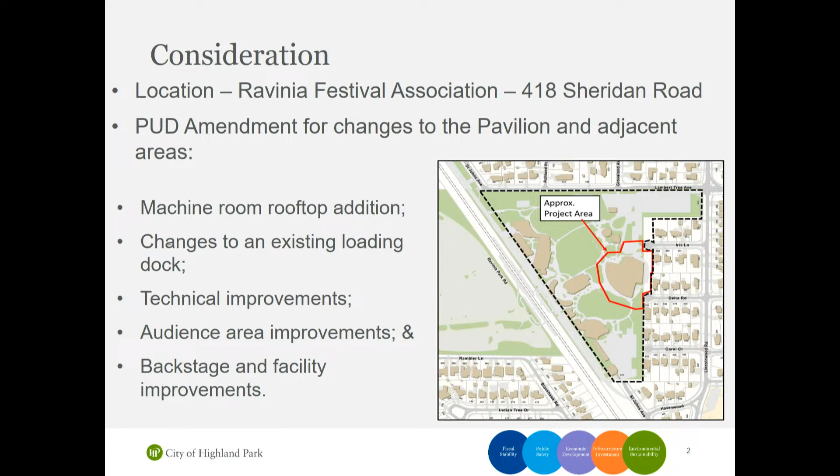This is a presentation on the continued application by Ravinia Festival Association for their Planned Development Amendment and Design Review. This was at the commission two weeks ago on June 4th, and it was continued to today. This slide is the same as two weeks ago, just showing the location of the approximate area of change of improvements.

The project is multifaceted, but it includes a machine room rooftop addition on top of the building within the footprint, changes to expand an existing loading dock on the north side, various technical improvements throughout the pavilion building, as well as audience area improvements to the auditorium area, and backstage and facility improvements.

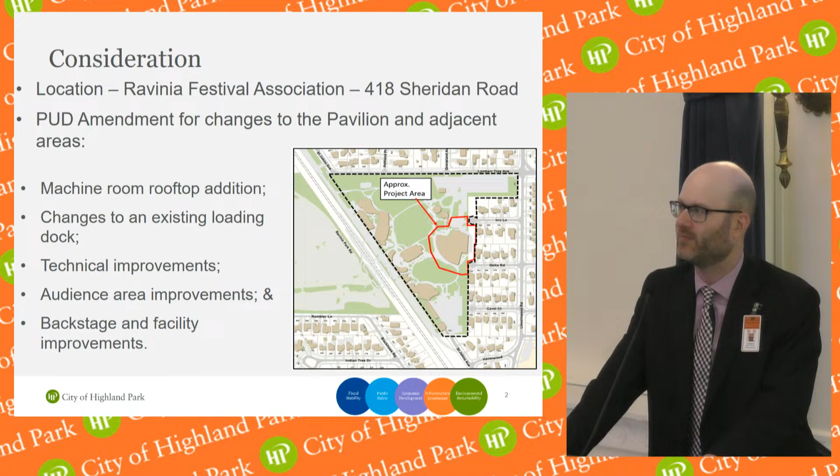There's also the requirement for a solid fence along the loading area, per an Article 22 landscaping requirement. The applicant submitted an updated narrative where they indicated they are open to that discussion. Staff indicated in the report that the commission can discuss if a solid fence along the loading area, in addition to what's already proposed by the applicant, is appropriate.

In the applicant's updated narrative, they put to writing what they had testified to two weeks ago, that they would be fine with some type of timer for the new wall-mounted lighting going along the east facade facing the neighborhood. It was staff's recommendation in the report that the commission could consider as a condition that the wall-mounted lighting be turned off by midnight or whatever time the commission deems appropriate. I know the applicant had discussed midnight in their narrative. The proposed signage lighting could match that and be turned off by whatever time the commission deems appropriate.

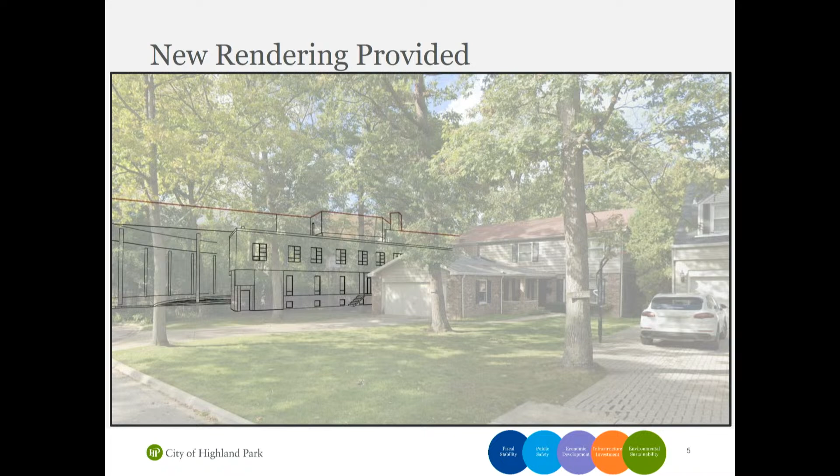I believe this is an applicant's exhibit, but I believe it's from Google Street View, because I pulled up Google Street View and it's essentially the same. The Ravinia Pavilion building, you can see it right there. So this is the applicant's exhibit of the existing conditions, and obviously there's tree cover in between.

This is the applicant's exhibit of the new rendering, so I can just go back and forth. We're looking right here at the machine room rooftop addition. Related to that, staff and the commission wanted to clarify what the step back was, how far the addition is from the edge of the roof. At the closest point, the north, it's 8 feet 6 inches back from the edge of the roof. It's angled, so it opens and gets further away as you go south, but that's the closest point.

This is just meant to show this. I tried to zoom in on it. This was in the packet, showing the step back, setback, and how it opens. This also shows that the distance to the nearest property line is 66 feet.

Modification changes: the impervious surface ratio - the applicant added pervious area that was highlighted on the landscaping plan, so there's no net change.

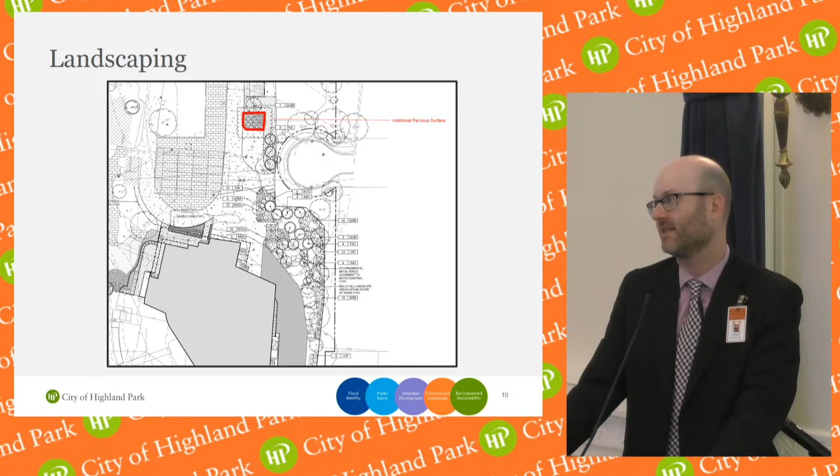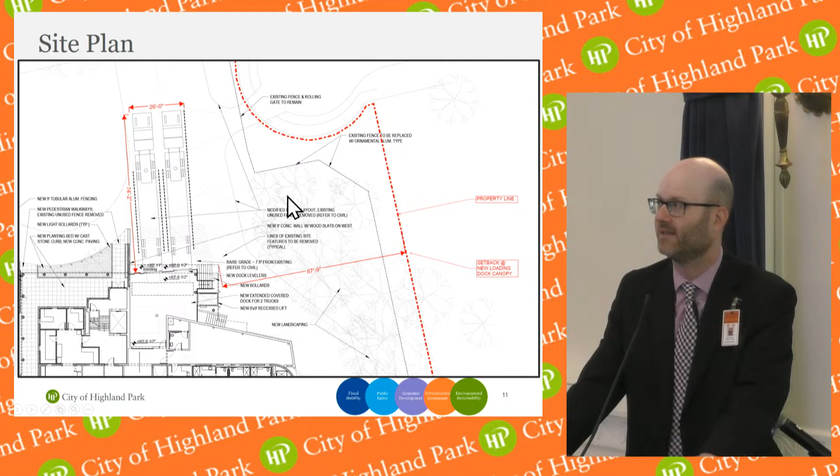This was the landscaping exhibit, again showing the pervious area that was added - this was in the packet. And this is showing the loading area, again in the packet, showing how the loading area is expanding. It's better shown in the packet, but you can see the landscaping the applicant is proposing along this area. They meet the landscaping quantity requirements - they're meeting and exceeding the quantity of landscaping that's supposed to go in.

And so that's my presentation. This is a public hearing - the commission should reopen the hearing and take testimony, deliberate and direct as appropriate. The commission, if ready, can direct findings of fact to come back at the next meeting. The commission is a recommendation body for planned developments; the city council is the decision maker.

All right, thank you. Do we have any questions for staff at this point?

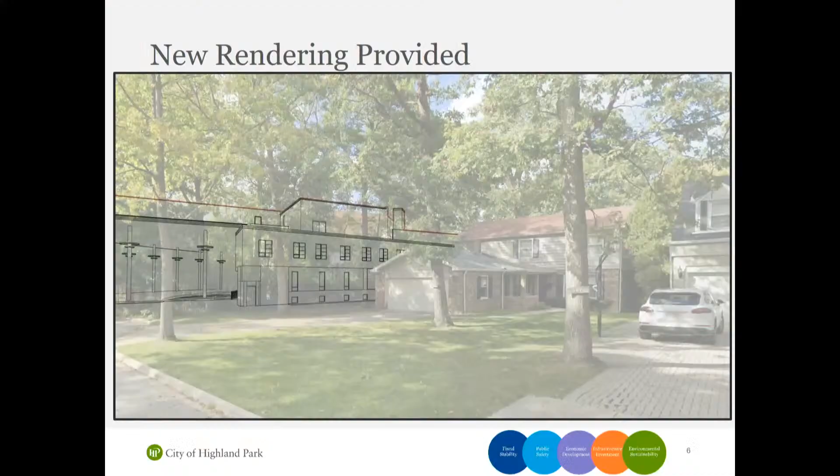I just have one, on that rendering on Delta - how far is that house, because that picture looks like they're right on top of each other, and I don't think that's the case. Well, the best thing I can show for that - I mean, I can open up my computer and try to measure it - but this exhibit, this is the rooftop addition shaded in red, and this corner is the closest to the property line, so this indicates the setback to that property line, not to the house. That number, which is a little hard to read, says 66 feet. So then the distance to the house would be 66 feet plus whatever distance that house is set back.

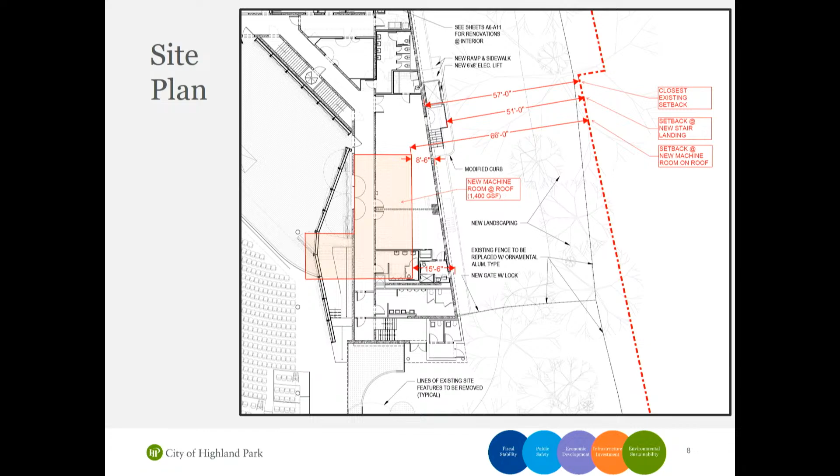Thank you. I've got a question on the height aspect of it. You noted in the packet that the 2006 ordinance granted them up to 50 feet in height. And we're not at 50 feet in height, even with what they're proposing - is that correct, or am I missing something?

What they're proposing is approximately 1 to 2 feet less than the existing high roof line of about 47 feet. So they're still within the 50 feet that was granted them, years ago. This is additional bulk, obviously, than what was considered in 2006 - that's why it has to be considered again. But you are correct that they are not asking to go beyond that limit, and it's not any higher than it is now.

All right, any more questions for staff? All right, does the applicant have a presentation to make?

Jim Schmitz with Ravinia. I don't have a presentation, but I wanted to let the commissioners know that I did have a chance to meet with the two residents who came to the last meeting and voiced concerns about fence color, the lights on the outside of the building, and the bulk of the new equipment room. I met with them a couple days after the meeting and again today. They're not here tonight, but they're satisfied with what we're showing - they saw these renderings and we spoke personally, so I just wanted to let you know that.

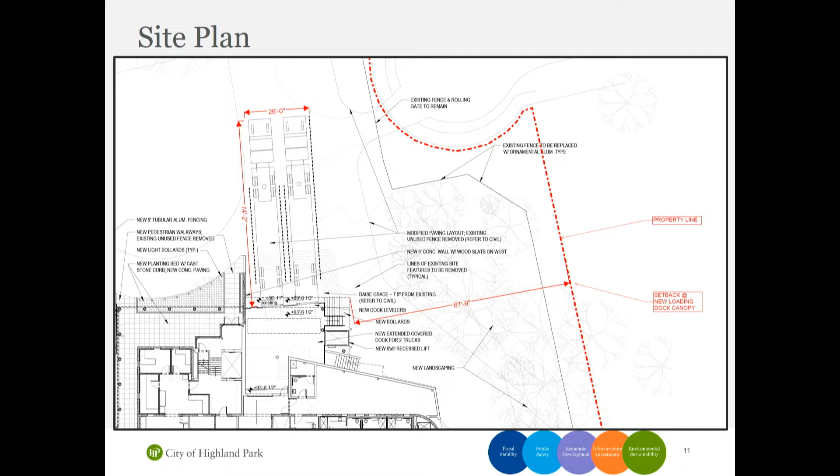Okay, what does the commission say about an 8-foot fence along the loading dock? I think there's plenty of screening already, and it's way much further away from any property line. I think if there's a loading dock that's already there, it doesn't seem to be an issue. It's kind of redundant. Okay, then I guess we don't need it. And also noting they're putting in landscaping above and beyond what's required by code.

Carl, are there any other issues we need to consider? The only other condition is somewhat of a standard condition. Even though the applicant indicates they'll comply with the 3,000 Kelvin, that is a staff recommendation nonetheless, that the commission would adopt that condition of approval as well. Okay, yep, all right then we can add that.

Are we okay, now we need a variance for the landscaping screening around the foundation, correct? Correct, that is one of the modifications requested. And are we okay with that, commission? Yes. All right, are there any other decisions that we need to make, Carl? Well, in terms of what was presented two weeks ago, plus today, no.

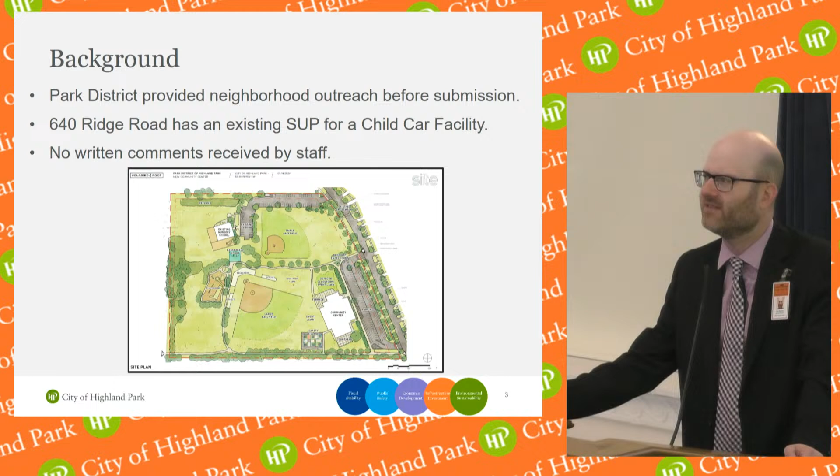The Park District did provide neighborhood outreach before submission, which was updated in the packet yesterday. 640 Ridge Road, in the corner, already has an existing special use permit for a child care facility, just for the commission's FYI. No written comments were received by staff for this proposal as of now.

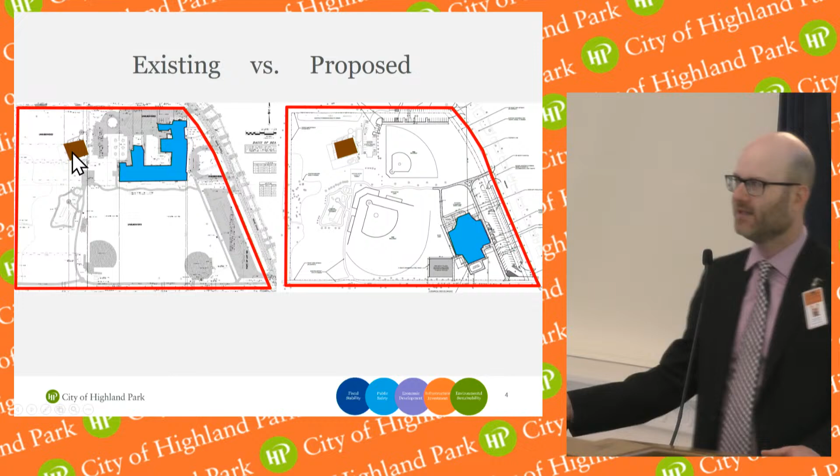So the existing versus proposed: the red outline here is the property boundary. The brown building is the existing childcare facility. Principally, what's happening is the existing building here is going to be demolished and rebuilt in the southeast part of the property. That's principally what's happening, though there are some other changes as well.

There are some changes to the parking lot in the north. Along the east, the parking lot will remain but is being restriped and reoriented. The safety village is being relocated from where it is right now. I found out it's basically a miniature city for children to learn safety as they go about a community. There are two baseball fields now, which will be reoriented.

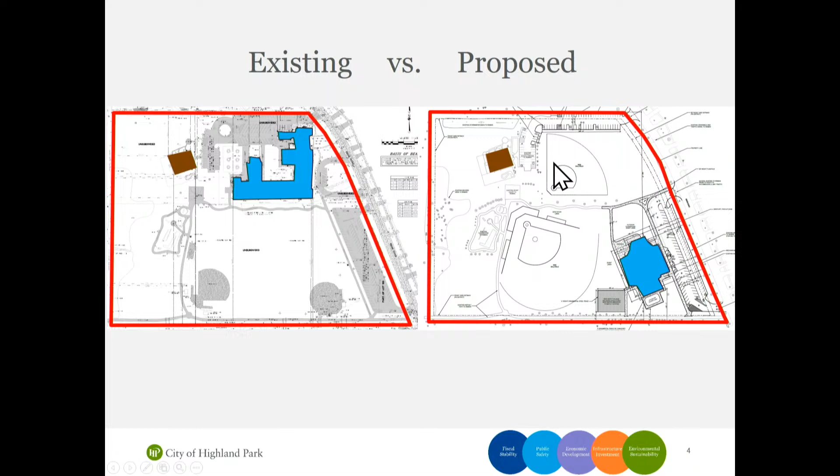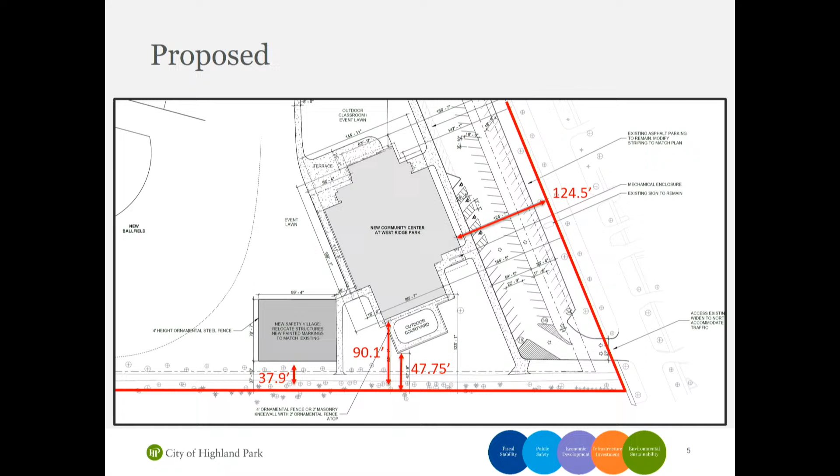Technically, it's 47 and 3/4 feet to the outdoor area, though that's not a building, but an outdoor structure area. And then nearly 38 feet to the safety village. All those comply with the setbacks—all bulk regulations are met for height and setbacks for this proposal.

Zoning code variations through the design review process, which the commission is the decision maker for these specifically.

Again, landscaping, the 5 foot in depth planting buffer that's supposed to be around the foundation. The code does allow some breaking for where there are certain doors, sidewalks, mech space, et cetera.

The applicant proposed canopies overhanging the building. If the commission looks at the elevations, that essentially acts as a porch, and the applicant indicates the plantings may not be feasible within that specific area because of the shade. The applicant's providing actually more than the landscaping quantity that's required, and I have a separate slide on that.

For exterior lighting, the applicant indicated 8-inch recessed LED in-grade uplights with that bug rating, the backlight, uplight, and glare. And also the bollard lights, and those do not meet the technical bug requirements, the backlight, uplight, glare requirements. So there either has to be a variation that the commission can approve if the commission finds, or the applicant has to revise those to comply.

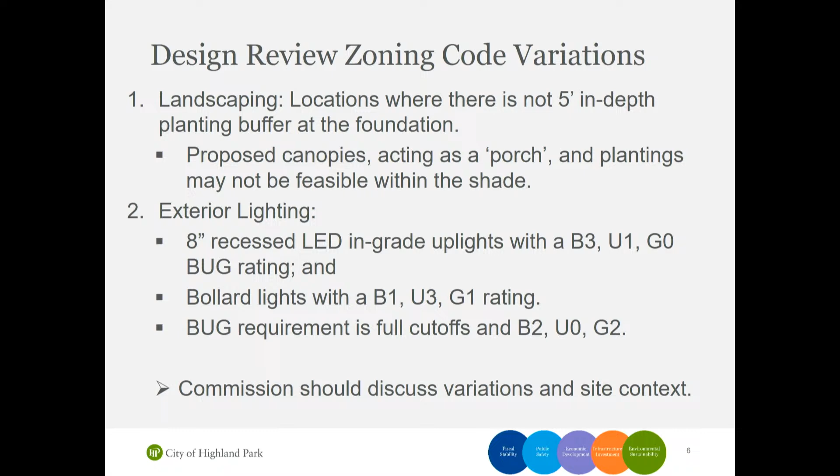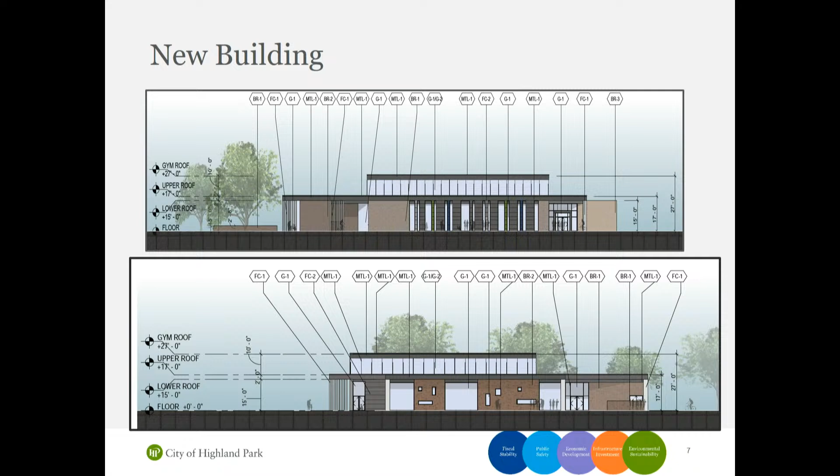On the top is the elevation that was in the report. It faces the street, it faces Ridge. The one on the south, the bottom, faces the neighbors closest to the south. These elevations were in the packet. I just put this slide up here.

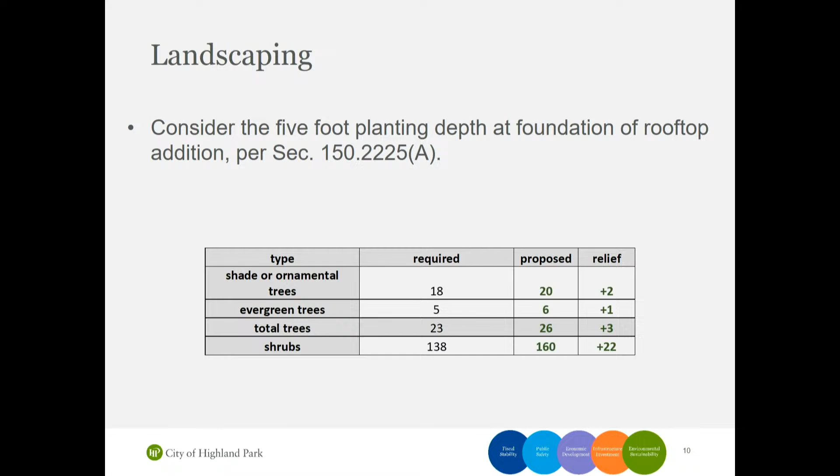Landscaping. So again, there's the 5-foot planting depth at the foundation. Oh, sorry, that's a typo. No, this is for the new building. But yeah, the landscaping requirements are all met. The applicant is plus on everything.

I already discussed lighting, and again, I'll just bring up the standard condition. Now the applicant's materials did indicate 3000 Kelvin, but again, it's always a recommended condition. This is the standard for lighting variation. The commission is authorized to consider bug rating variations, provided that no such variation may be granted unless the variation will cause no greater impact on the surrounding property than the standards set forth in this chapter.

Commission should open the public hearing, take testimony, deliberate, and direct as appropriate. Commission is a recommendation body for the special use permit and rezoning. The city council is the decision maker on those two, but the commission is the decision maker on the design review and those two variations.

All right, and that's my last point. The only other thing I want to add is about the rezoning, because I guess I don't have a slide on that. The property is currently zoned R4 single family, and that's the same zoning as the residential neighborhood to the north and to the south, and also the school property to the west. Then to the east, it's a single family district as well, the R6, which allows smaller properties than the R4, but they're all single family zoning districts.

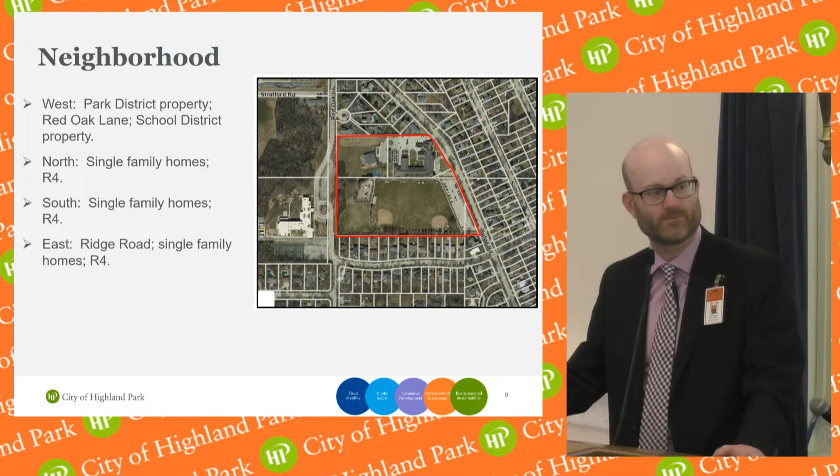Do you have any questions for staff? I have a question on the public activity zoning and why we have what we have. When I was looking at the map, I kind of get that the public activity is the existing community center, senior center, right? And so this one would seem to fit with that, but I also noticed that Centennial is not public activity and neither is Fink, and they both have recreation buildings on them. So I'm just wondering what's the logic, what's the reasoning? I mean, I think the PA zoning is a newer form of zoning, is that correct? And so as these projects come through, we're updating them. So if something comes through for Hidden Creek, then we will update the zoning for Hidden Creek.

Actually, I think Hidden Creek is already done - we did that one a couple of years ago. And the fire station too, right Chair, yes, we did that as well. You're right, and we have done this in a few places. One that comes to mind is the Aqua Park area, where there's a maintenance facility that the Park District constructed several years ago as part of an SUP process and rezoning. We also at that time rezoned the fire department's headquarters PA as well. So it's consistent with our practice to do that. The Park District is requesting this change as well, and they've been working with us toward that goal.

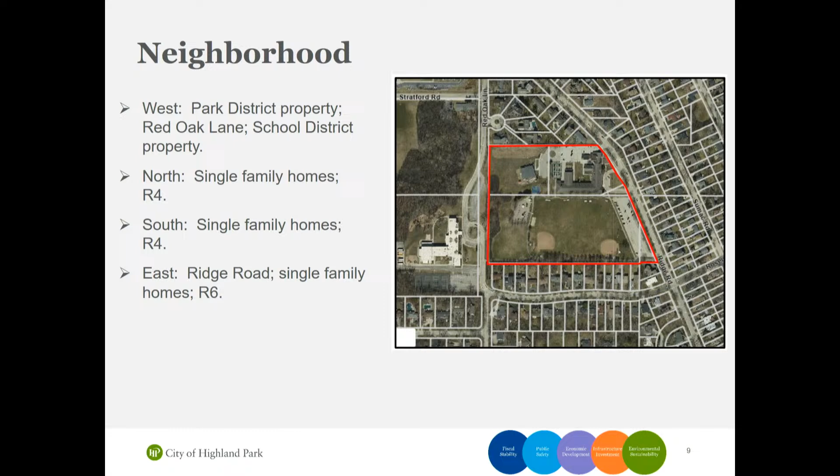Okay, any more questions for staff? All right, do we have a presentation from the applicant?

So it's a fairly complex drawing that I don't know if I can fully read, but the blue represents the underlay of the existing property as it exists today. What we're showing is how the existing school would come down, a new ball field would take its place, some existing parking would remain, and at the same time we'd remove the old drop-off loop, creating a safer entrance into the existing parking immediately off of West Ridge.

So this area here is removal, and then new parking.

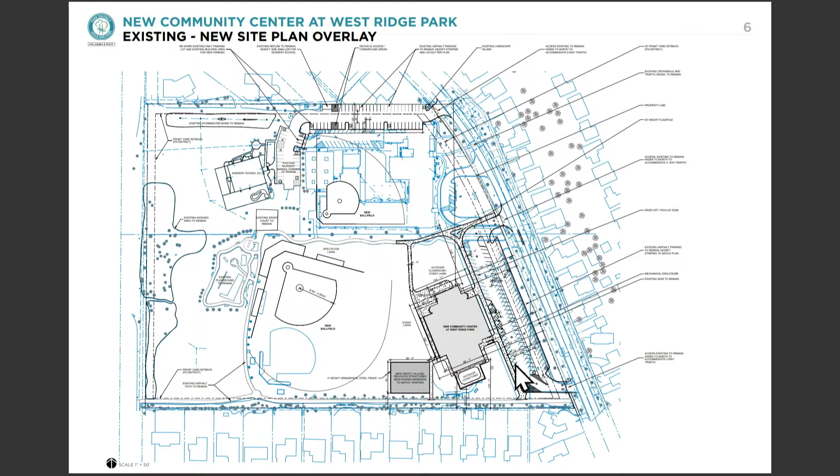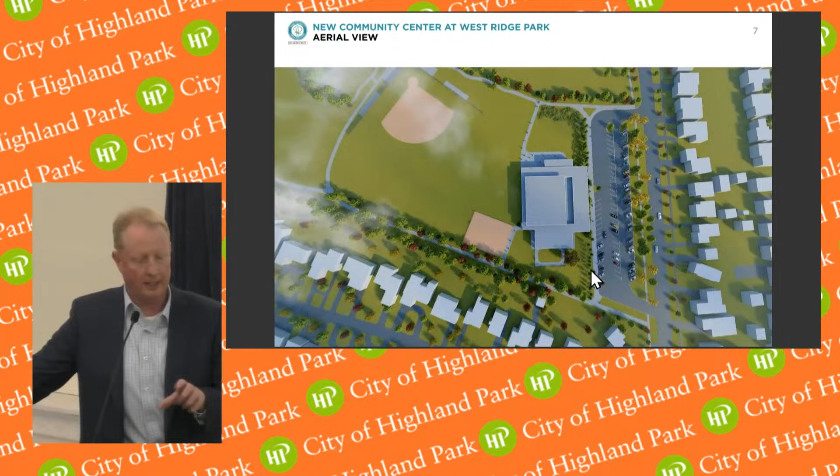In addition, that gray or tan square you see is Safety Village. Again, that's not part of this application, and we are studying where it might go. There are two requests: from a youth enrichment perspective, teachers like to use Safety Village for educational purposes. Whether it's here or in its current location is something we'll continue to evaluate as we go through the overall site plan, but the adjacency from a programmatic perspective was asked for.

At the south end of the building, you see the proposed outdoor courtyard—an outdoor youth courtyard, as Manager Schwartz indicated. What's interesting is that it can flex for art classes or youth enrichment, intended as quiet learning spaces while giving us outdoor space. At the north end, you see the outdoor event area and lawn area, flexible for the community rooms and meeting event rooms.

One thing we learned during programming about two years ago, while extensively studying the use and utilization of this property, is that for these community rooms, being able to open them to the outdoor area and host different events with an indoor-outdoor experience is very important to the overall culture and utilization of the facility. So having that space at the north end is intentional and very important.

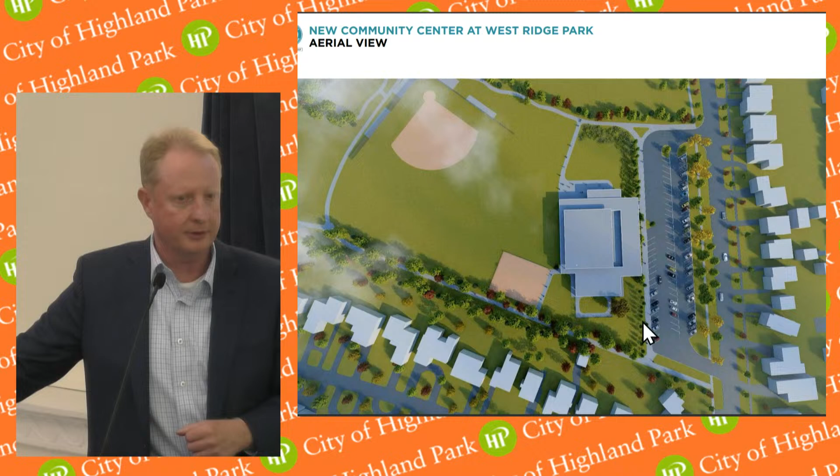So this area here is the south courtyard, and that's still being discussed.

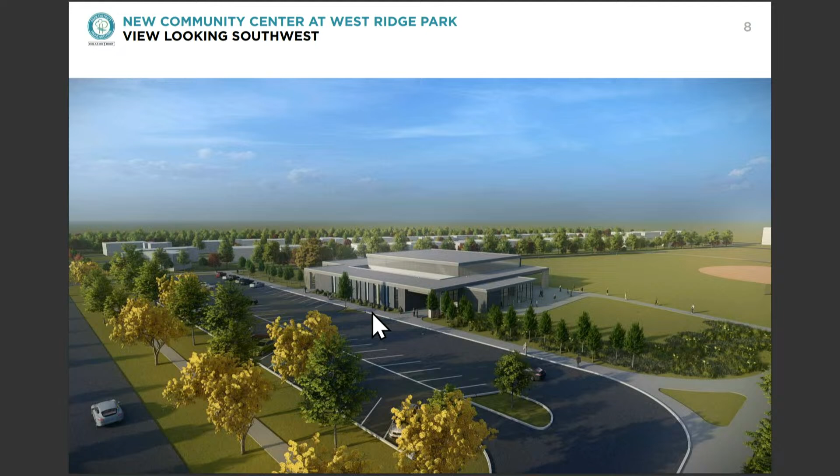So now we're looking at an aerial view of the northeast corner of the building. What we're seeing is the main entry, where there are a couple of people walking into the building.

To the right, or north, side - north is to your right-hand side, south is to the left. At the north end, what you're seeing are the community rooms, with a transparent wall and doors that open up onto the event lawn.

What you're seeing is intentionally our design to keep a single-story presence around the entire perimeter of the building. The goal was that as we're facing the different residential neighborhoods, we wanted to make sure we have what we call a quiet facade, a quiet presence, but single story.

And then the gymnasium is in the center of the building, and that's the clerestory you see just popping up above the roof line of the single-story element.

We have designed into this detail mechanical wells, so none of the mechanical units will be seen from the street - they will be in these wells. This does two things: it helps with not seeing them, as well as screening the sound from these units.

And again, the setbacks will be plenty, but in addition, really working with staff and with the park board, we wanted to make sure that was an important element we discussed.

And then all the materials are sustainable materials, can be recycled materials, so very conscious of the sustainable practices for this facility.

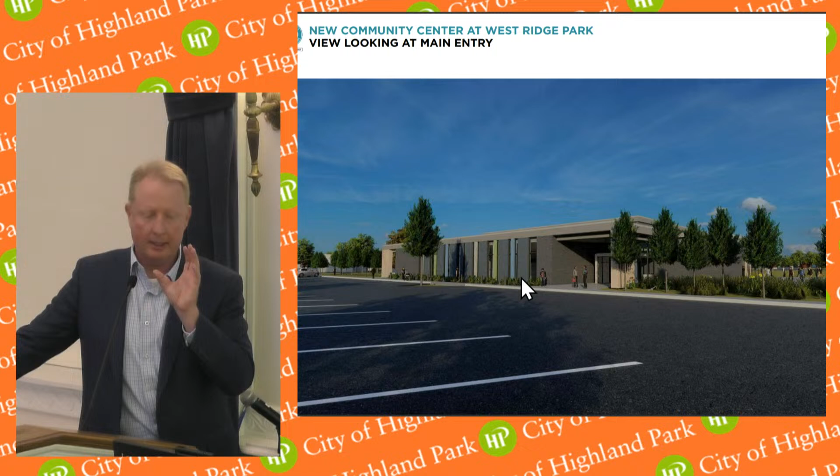So now as we look at the parking lot, as if we were parking and starting to walk in, what we're seeing here is the main entry. Then to the left of the main entry is the dance and multi-purpose studios.

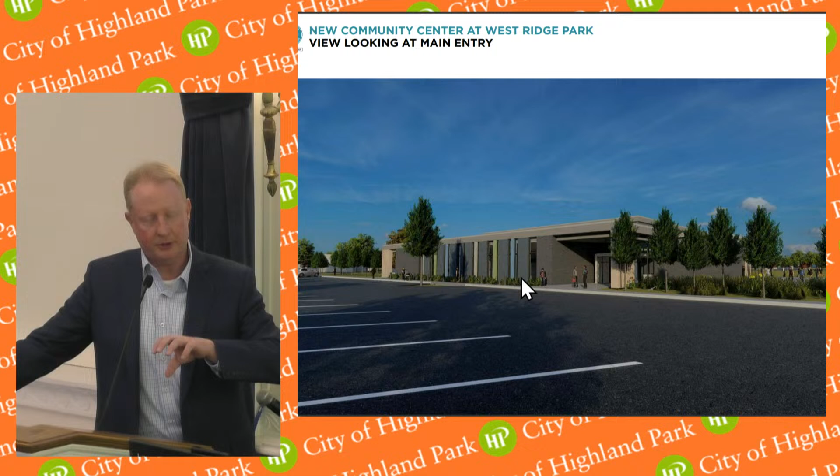And then as we go further to the south, we see back towards that courtyard area. We're looking at different brick materials for the facade, trying to have a bit of a fun presence with the colors, and the colors represent the colors of the Park District of Highland Park.

Also these porches really welcome people to come in and stand under them during inclement weather. We mimic this detail both on the east side of the building, at the main entry, and also on the west side, on the park side. The intent is that if you're out doing an activity outside and need to come into the building or want some shelter, that would be available to the users of the park.

In our programming, we discussed that it would be great if parents were out here gathering, with an opportunity where the ball game is going on, maybe another event happening, or at least an opportunity to gather.

We all know, or used to be, springtime is fairly cold and fairly wet, so having somewhat of an area to gather and not sink into the sod would be great. So multi-purpose, multi-function - really intended to be limitless in terms of how it can support the rec programming and community uses for this area.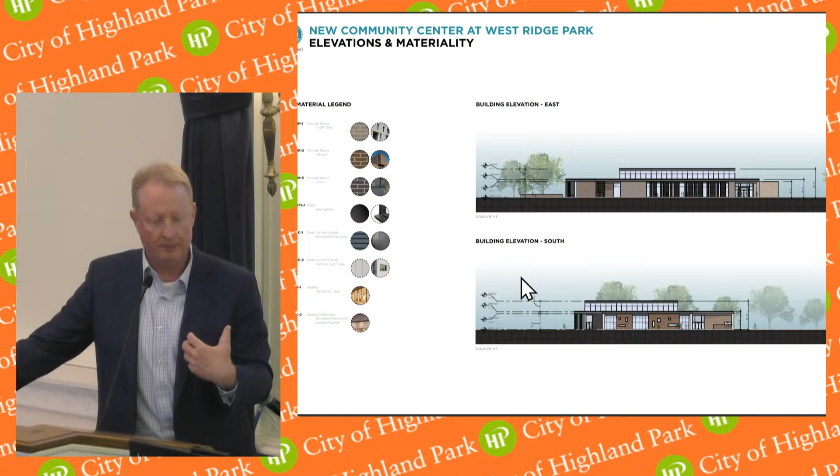These are the material boards we have, and I have the board here to show the commissioners. We're looking at three different blends of brick for the building, and we're using a cementitious siding and board for the eaves and some of the infill panels. The intent is to draw upon a cedar look and maintain the natural materiality and vocabulary for this park setting, but in a material that is durable, won't rot, and will last forever. On our buildings now, rarely are we actually using wood, for sustainable practices, but the intent is to draw upon beiges to charcoals and blend the bricks.

So what you'll see here is on the elevation to the east, and the south elevation, which is the youth enrichment rooms, two different kinds of blending of the masonry of the bricks. We think this will add scale and interest for the residential properties as well as the building. And again, on the west elevation with the gymnastics gymnasium, this kind of Kalwall — if you're not familiar with it, it's a translucent panel.

It's environmentally sustainable in terms of allowing plenty of daylight in, so we can minimize how much artificial light we have to have in the space, but it gives us an opportunity for diffuse light, so we're not having to manage the thermal heat gain we'd get from a natural clerestory window.

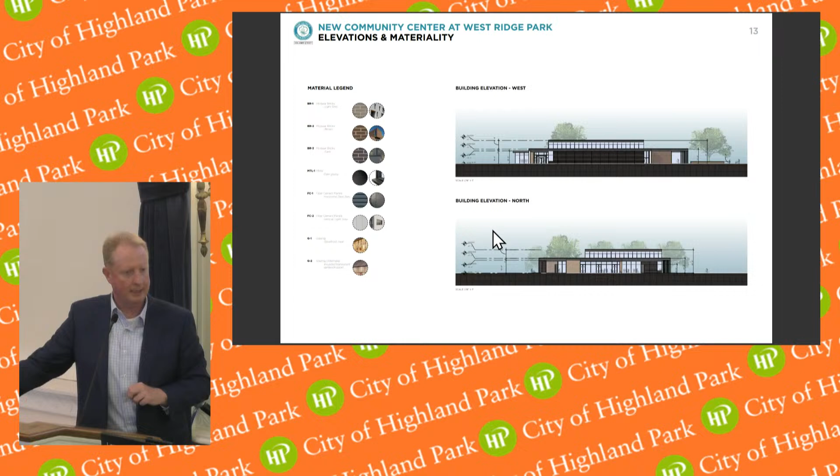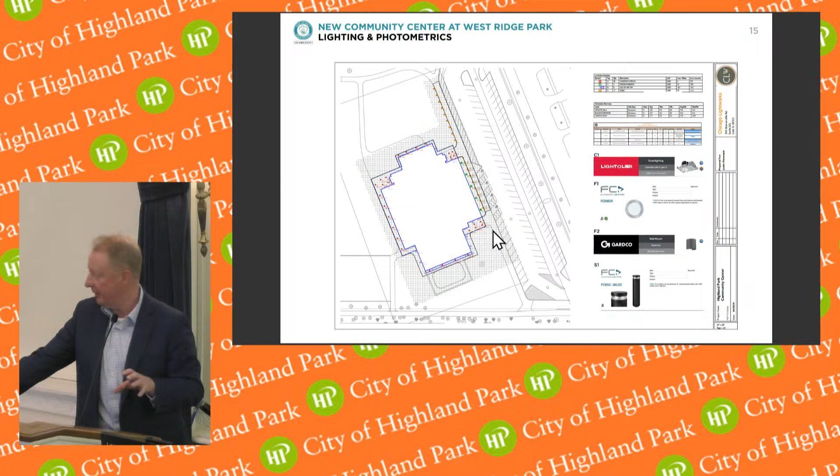And that's the board we have in the packet for you guys. So in terms of the fixtures, Barb, I'm going to have you clarify a few things, and then maybe you can walk us through the site plan. Does that sound good? Okay, thank you. Thank you. So two buttons here.

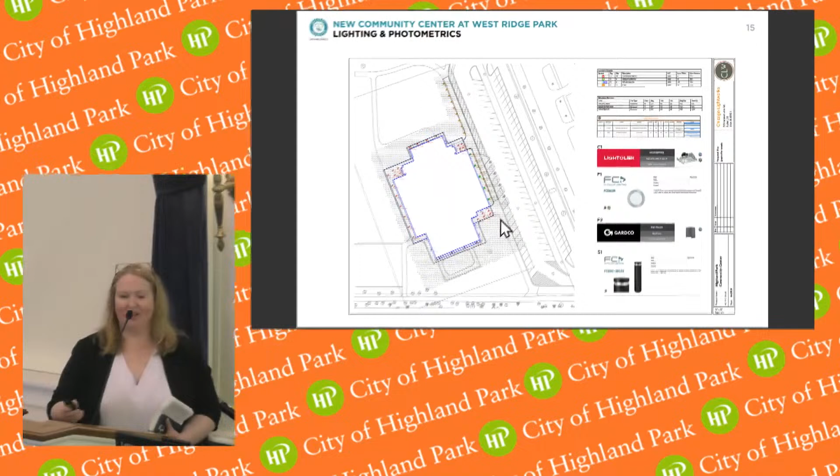Obviously, the intent of the application is to be in compliance with as much as we possibly can. The first thing is we've been speaking with our electrical engineers and lighting designers to make sure we can select fixtures compliant with code requirements. Those came back to us today, so we'll be resubmitting those to staff this week. The intent would be not to use the uplight fixture on the exterior of the facade, which I believe is the F1 fixture on your plan, and we'll stick with the wall sconce for everything, which is the F2. The F2 is one of the compliant fixtures and focuses on downlighting.

We also worked with our electrical team and have another bollard that's compliant with all the requirements. It's very similar in aesthetic, but it controls that downlighting, and we'll keep that in compliance. Those bollard lights are located along the drop zone in the front facade to make sure there's lighting for the adjacent sidewalk.

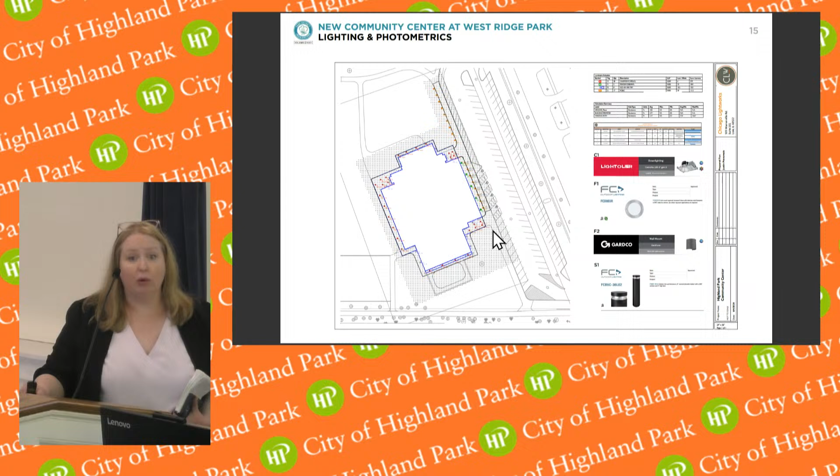I think the other fixtures we were proposing were under-canopy lights within our canopy areas, just downlights, so you could see in those areas. Those are compliant, and we intend to keep those.

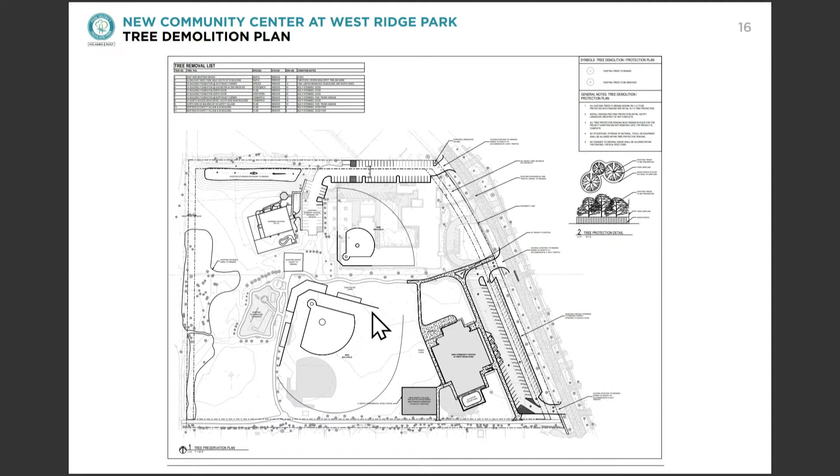Let me see if I'm going the right way. Yes, okay. So the other thing is, obviously, Park District trees are great, and we're trying to keep as many trees as possible. Unfortunately, there's a few trees really close to the foundation of the existing building, and we don't think they're going to make the demolition process, so we've slated those for demolition — they're within 10 feet of the building. Otherwise, we're trying to maintain everything. There's one or two trees also in the path of construction of the new sidewalk and building.

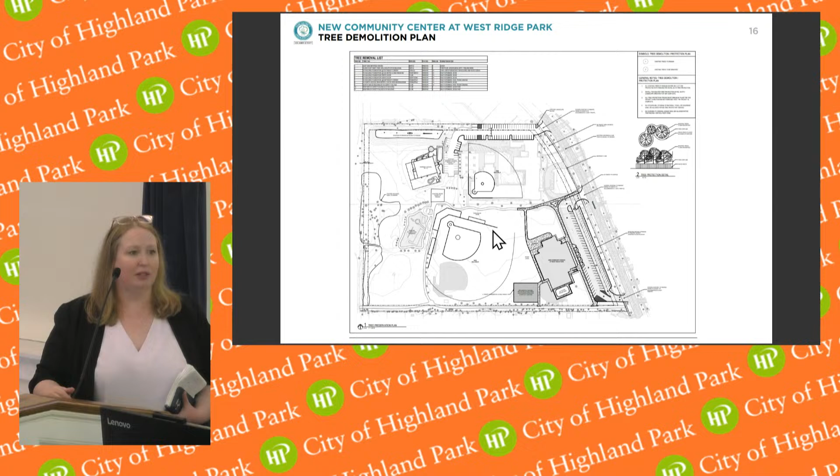So we are proposing to make up for any deficit in that area. Obviously, we want to keep as many trees as possible. We worked really hard to maintain the majority of the trees around the existing building. The east-west pathway that runs through the site, which is kind of wiggly, we're maintaining because it has a lot of really large trees along it, and it's an amenity to the park. We don't want to lose that. It provides a nice separation between the ball fields, but still connectivity below, which is great, and we wanted to maintain that, so we'll continue that forward.

On the new landscaping, our goal is compliance as much as possible. As Eric described, this building has a series of porches, and those need to be open and accessible for people to come in during inclement weather, but also gather if needed. So we're trying to provide foundation landscaping where we thought it was easily feasible, which was right along the front of the building. We have foundation landscaping along the center portion of the building that is 5 feet wide.

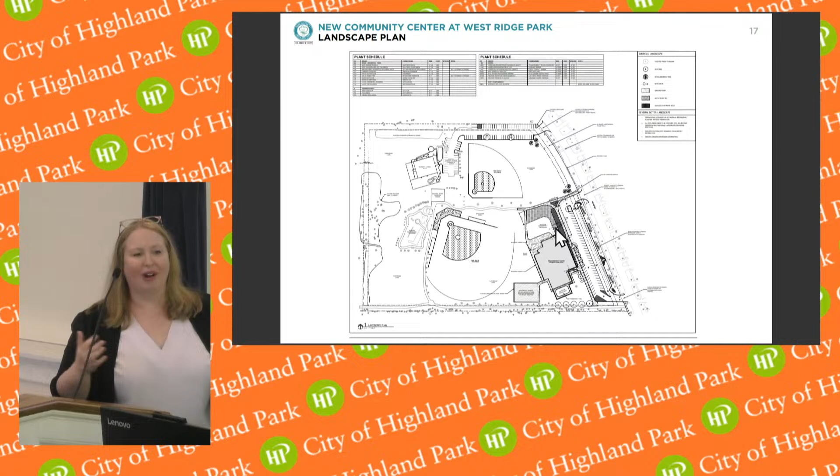Then we're taking the area to the north and continuing the trees, as well as proposing a butterfly low-maintenance prairie mix that helps define and separate the event and outdoor classroom area from the adjacent walkways. It provides a little bit of privacy, but still wide open visibility, and an outdoor learning environment that could benefit some of the rec programs. The other thing we're trying to do, and while it looks very small in this plan, is maintain a really beautiful existing large tree on the southeast corner of the building.

It's right here. We moved the building around so we could keep that. We wanted to make sure that stayed in the plan. So we're trying not to put new foundation plantings under that tree, just to maintain its health, but we'll put some trees in front of it.

And to mitigate all of this, one of the things we're trying to do is put additional foundation-style or lower screening between the existing parking lot and the public sidewalk on Ridge. This is both in response to the neighbors' comments, but we also think it'll add an extra layer that would be beneficial to the site design.

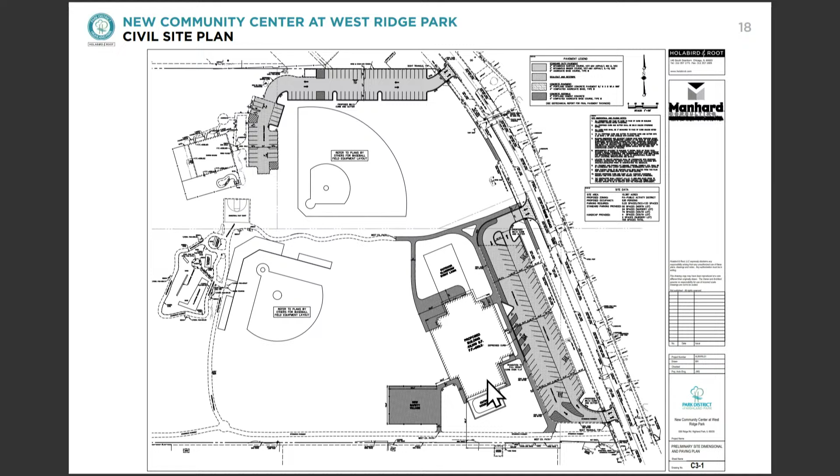Okay, what's next? Oh, one other thing about the landscaping plan. I know the city forester commented about a deficit based on the plant species. We will adjust accordingly. We are trying to mimic the plant palette of the park and be respectful of that, not completely divergent, but we'll find a way to make sure the plan is in compliance.

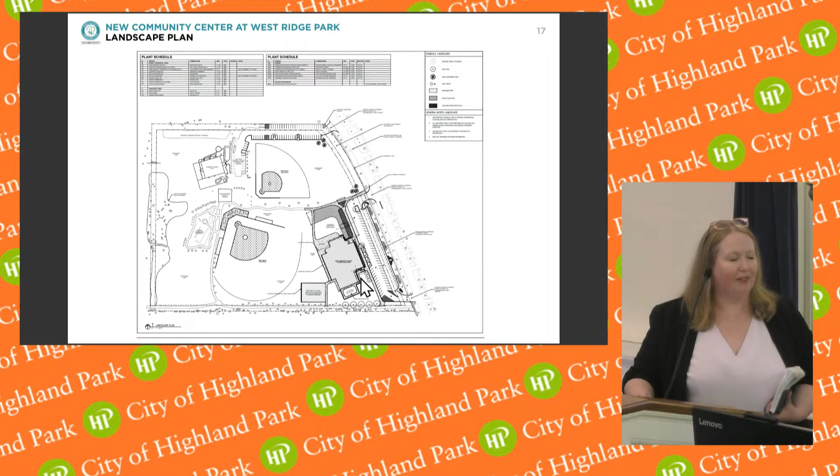You just remind me, you are a licensed landscape— I'm a licensed landscape architect in the state of Illinois. How's that? Sorry. Thank you. All right, then we'll keep going.

One of the things, just to add clarity to what Eric was providing before, the civil engineer did provide a site plan that overall showed the paving differences of what we're changing on the site, and it's relatively minor. One thing you'll see is on the north side of the site, the existing parking is getting narrower into a kind of dual-sided aisle design.

It's in place of existing parking, as Eric said, to provide more green space back to the park, and that area is going to get pretty torn up during the demolition of the building. So we're trying to clean that up as part of the overall site design.

The other thing Eric mentioned is right now along Ridge Road, there's a drop zone for the existing front door of the building, and then two access points for the existing south or main parking lot. So there are two entrances and exits to Ridge Road right now, right next to each other. What we're doing is eliminating one because it's a lot during busy times, and we think it will help both increase safety and clarity of movement.

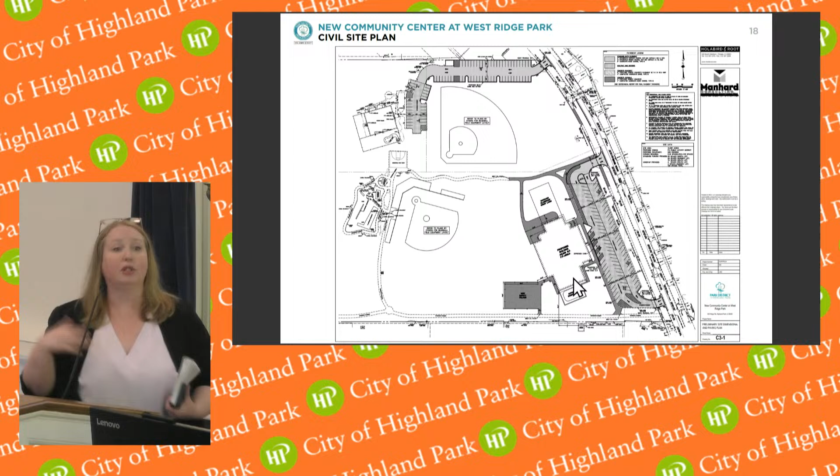Right now, a lot of people are coming in one way and out, and they end up driving the wrong way in the parking lot. So what we're doing is restriping the parking lot to make two directions of path through. Right now, you enter from the south, drive only north, and exit on the north, but people are coming in from the north and driving backwards. So we're providing the opportunity to respect the traffic patterns already coming to the facility, making sure two-way traffic can move through the lot, as well as providing a drop zone at the existing building to replace the one being removed.

Let's see, I think that's our presentation. Thank you, and we are happy to answer any questions. Great, thank you. Do we have any questions for the applicant?

I do have one. Let's do that. We're gonna back up and show the animation real fast, if that's okay. Oh, sure.

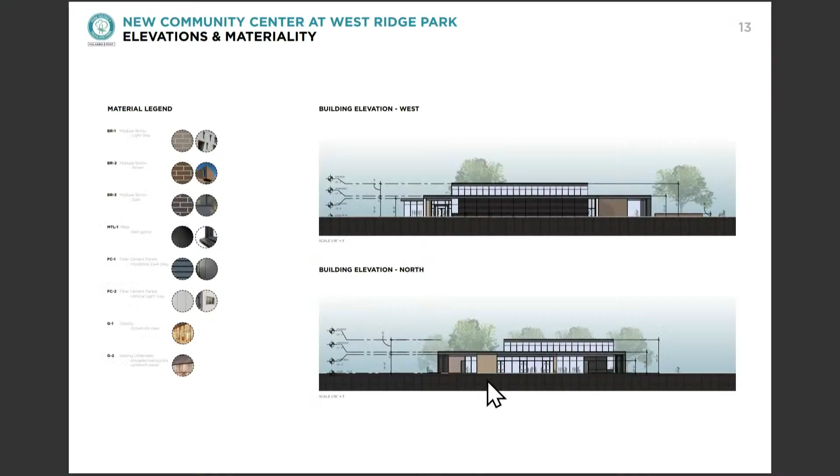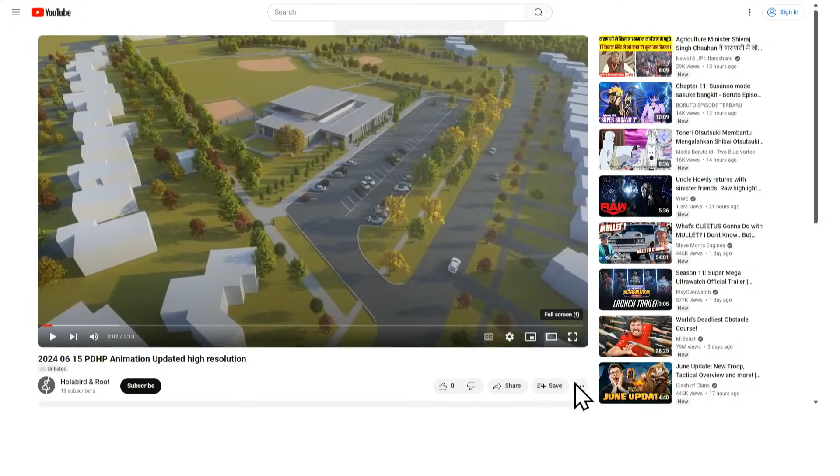If I have to exit that, I'll try it. Should there be volume for this? No, that's okay. Eric, do you want to walk through? Yeah, I'll, thank you, Carl.

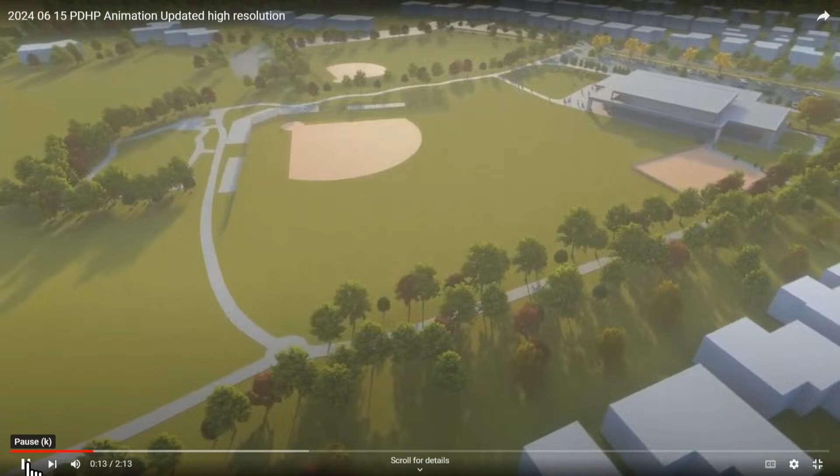Thank you. So what you're seeing here, we're rotating around. We're at the south, now looking north. What we're going to do is pan out to the west and start to look east back towards the building. You can see the relocated ball field to the left, the new proposed smaller ball field where the old facility would be taken down. As we rotate around, again emphasizing the view looking at the event lawn, the event patio, just some of the anticipated activity with the building.

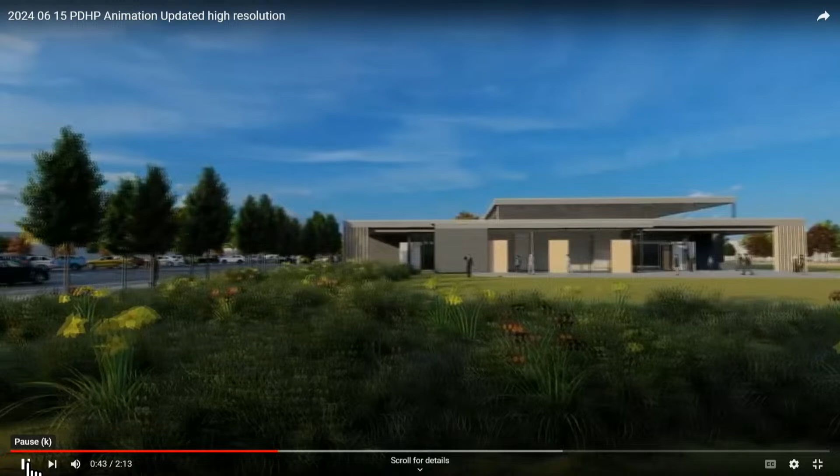So we're now going to come down the sidewalk. We're actually going to walk from this north end, and we're going to turn right, walking south in towards the main entry. You can see on the right and left side the porch details we were describing, and then the landscaping that Barb has described in terms of screening and offering additional landscaping on that edge.

Then we're going to pull out and start to look at what that main entry represents from the parking lot side, again from this existing parking lot. And then the aerial, as we described, demonstrating the existing buffer between the existing parking lot and Ridge Road, but also trying to take advantage of that existing parking lot, with the building sited there.

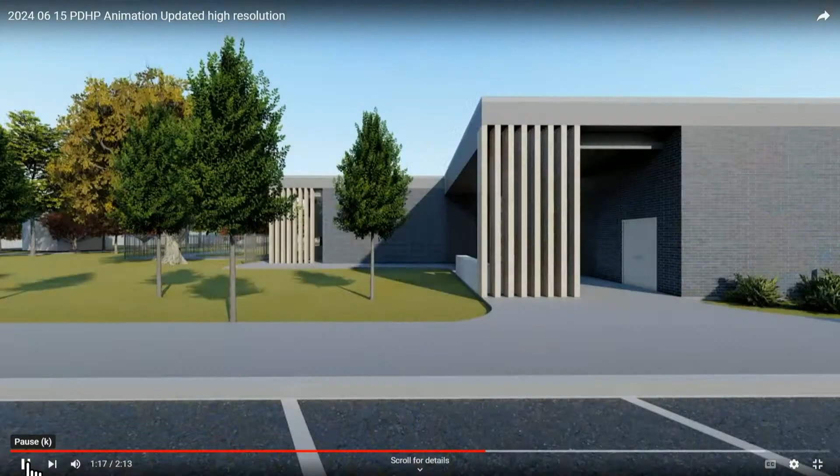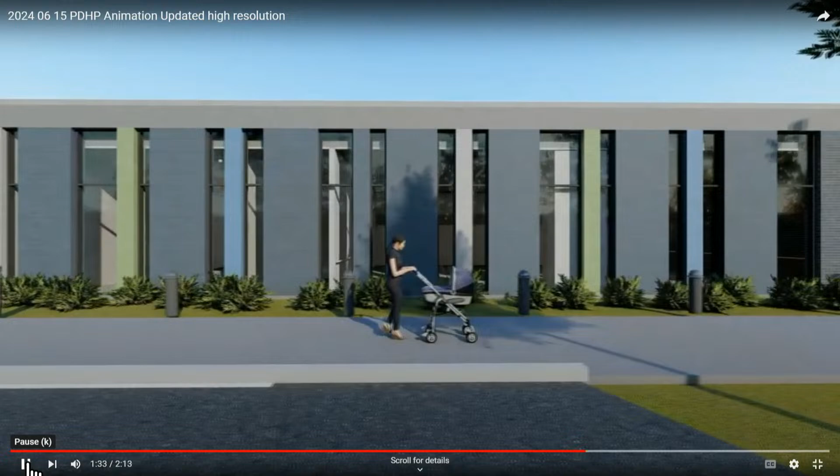And now, as if we're walking from the south end of the building, we're going to walk north in the parking lot. Again seeing the materiality of the building, the colorways representing the Park District of Highland Park's colors, and then heading back towards that main entry, with some animated birds in this. Big bird—I think our intern had fun with that one.

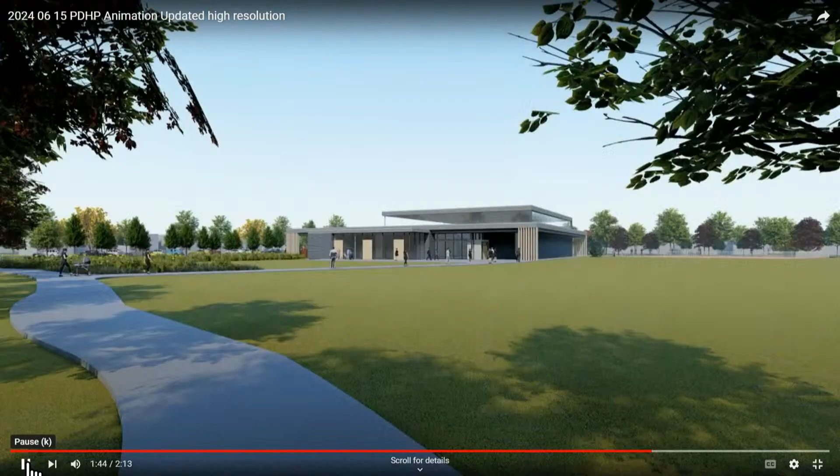And then as we pull out, we're going to see another aerial for this, but really that park setting. We're very proud of this view, kind of this pavilion-in-the-park concept. And then the final aerial as we see how this building is sited with, again, the emphasis of leaving as much open space for the park setting as we have on the facility.

So now we can certainly turn it over for questions. Thank you. Thank you.

Go ahead, Commissioner Mantos. So I guess my question is from the end of your presentation with regard to the parking lot. Having been to the West Ridge Center, the parking lot's kind of chaotic in my experience, so I appreciate the two-way traffic pattern. To my eye, and I don't have the dimensions off the top of my head, it seems narrow—just as a comment. And then I guess my question is, is there any plan on that middle angular parking to put bumpers or anything to prohibit people from going too far into the other aisle?

You want to take that? Just to clarify, obviously Manhard Consulting's been working with us on this, so I'll let Barb convey their comments. Thank you. The existing curb lines of the lot are what we're keeping, and the spaces as drawn are code compliant. The bumper stops you're talking about are something that are very possible. We weren't showing them on the plan because they're hard to navigate in snow removal periods, but they're otherwise very feasible in the middle.

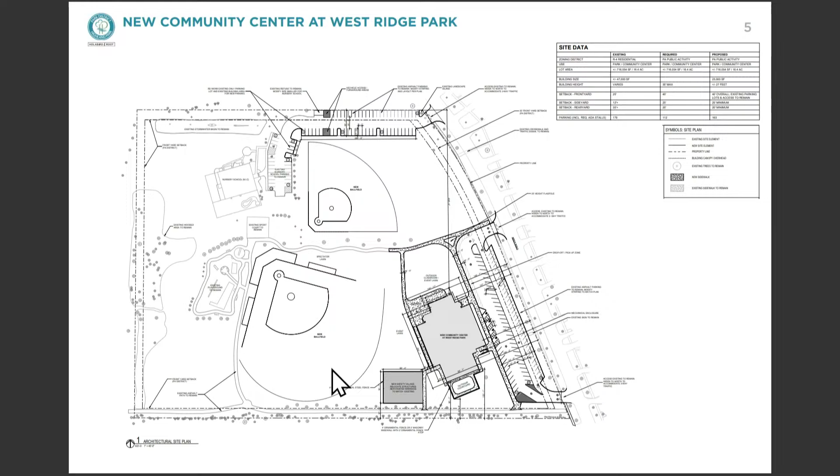Yeah, there's the one in the back. So what we're doing is rotating one up and around, and for the purpose of this discussion, the other one would go in place of the building coming down, creating new green space.

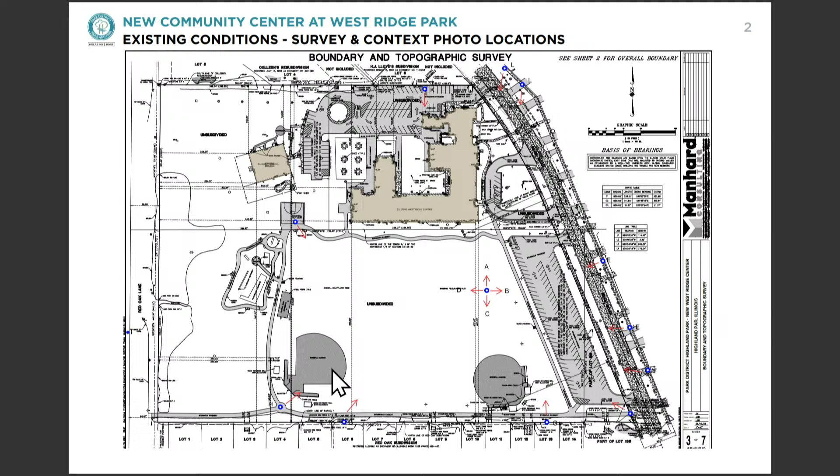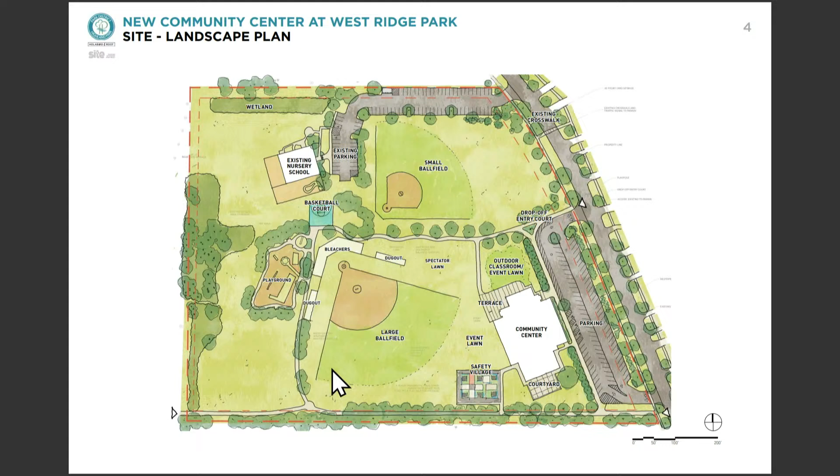In terms of how we look at this, we're trying to locate the activities toward the center of the park. If you think about where the ball fields are now, as a parent you can have a child at the playground and kids playing baseball or softball, without everything spread all over the park. We're intentionally driving the activity toward the center, near the basketball area, creating a hub so parents can watch their children, see the games, and visit with other people. This is what we're looking at trying to maintain.

Okay, so I heard that we're going to be solving the light variation requirements by getting different bollards, removing the uplighting, and turning it all into downlighting. Is that correct? That is correct. So we don't really need to discuss that anymore.

Chair Moore? Yes. May I ask some questions? Absolutely. Thank you. And would Corporation Counsel and the two directors stop me if I am going into territory that I'm not allowed to speak to? I hope it's okay to say that I like the clean, sort of pared down look of the building.

From an environmental standpoint and also warming up the building, have you looked at—I see a material board, reclaimed brick, permeable pavers in the parking lot, and for that matter, at some point you'll be talking about solar panels, I assume. But from the sustainability point of view, have you looked at these things? And also, I would assume reclaimed brick would warm up the building as well.

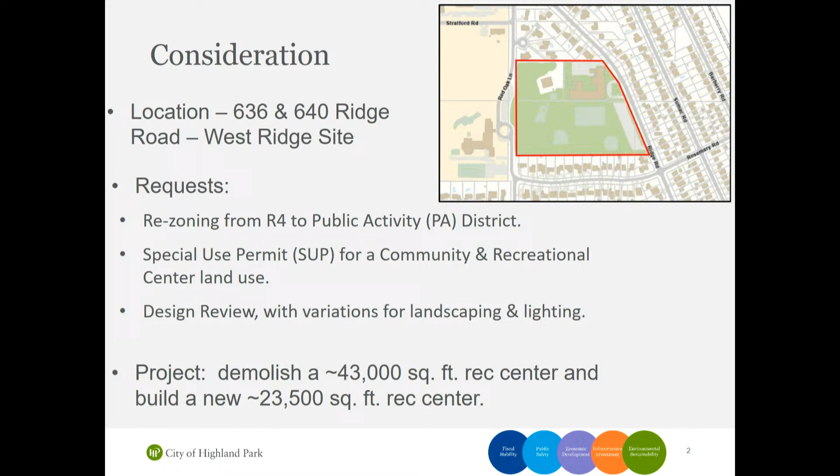So now we need a special use permit for a community and recreational center land use. Does the commission feel it needs more information on this? Can we get a motion?

I move that we direct staff to draft findings of fact recommending approval of the special use permit for the community and recreational center land use as per the application. Motion by Commissioner Hecht. Can I get a second? Seconded by Commissioner Kirsch.

Please call the roll. Commissioner Henry, aye. Commissioner Mantis, aye. Commissioner Hecht, aye. Vice Chair Kirsch, aye. Chair Moore, aye. The ayes have it. This motion carries, and staff is directed to draft findings of fact recommending approval of that special use.

Okay, so now for the next item, the design review, the applicant is coming back with the bollards and the downlighting, and I would think more detailed plans about the outside. So do we want to move to continue the issue to either the next meeting, or Carl, how does that look?

The next meeting, the meeting after that? We would recommend that all items be continued, so the next meeting, July 2nd, Tuesday. Okay, so all items are continued. We directed findings of fact, so they have to come back, right?